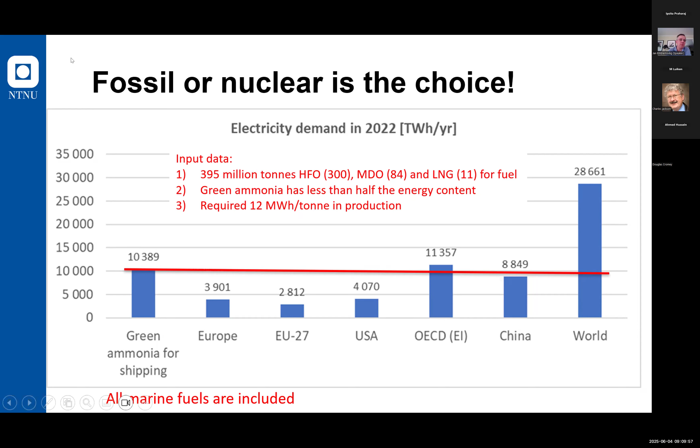And hydrogen gas is a very problematic molecule. In my last industry job before I came to academia, I was heading a company that made thick pressure vessels for the oil and gas industry, with a lot of complicated welding. And hydrogen gas is one of the worst things you can get up from an oil well, because it leads to stresses in the welds, can lead to failures, failed steel structures, etc. So it's a very difficult molecule to control.

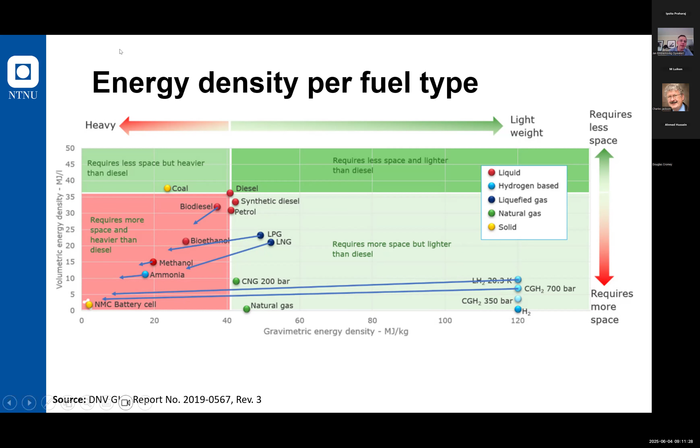But assume that those long arrows are 1 meter; then uranium would be 32 kilometers away from where you are sitting now, and thorium even farther. And I think this is really what the green transition has to be about. When we change energy density from what you see here on diesel to something dramatically different and better, then we really start talking.

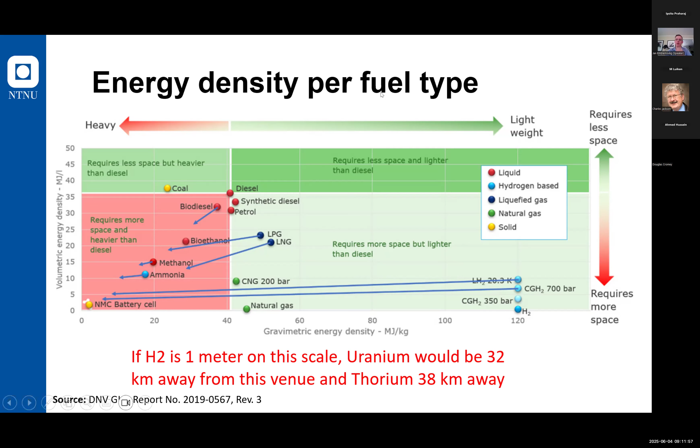So we are looking at basically two major opportunities. One is, of course, to put the nuclear reactor directly in the ship and have so-called direct nuclear propulsion. And we see a lot of possibilities here, as you can see: faster ship, no emissions, walk away safe, even lower cost. We'll come back to that. There are, of course, challenges,

obviously. We can also make synthetic fuel by using, for example, big nuclear facilities on land, and then make fuel either from the rest heat through thermochemical processes or through electrolysis using power. But as you saw on the slide before, that leads to a lot of losses. But it is possible, absolutely.

So in our research now, we have discovered that if we have more than 5 megawatt installed power requirements in a ship, then direct nuclear propulsion is the best. Smaller ships, aviation, trucks, and those kind of things would probably need synthetic fuel. And by the way, aviation is almost as bad as shipping. So when you take aviation and shipping together, the challenge is really massive.

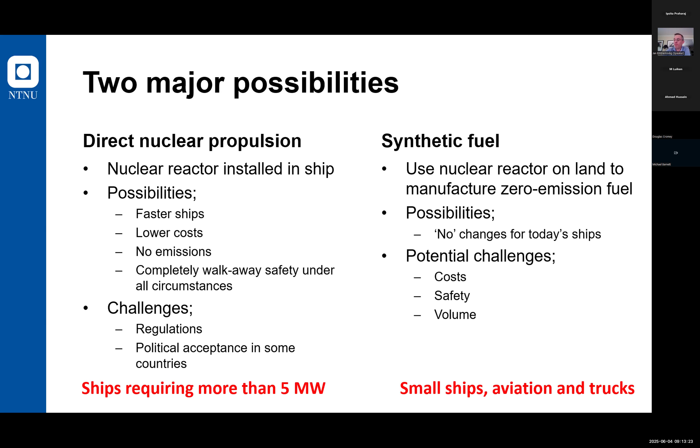So we did our first initial analysis. This is an Aframax tanker. And as you can see, it's actually the second smallest of what we call deep sea tankers. Deep sea refers to the part of the maritime industry that basically crosses the world's oceans, from Europe to US, Canada, from Canada to China, across the Indian Ocean and so on. The long stretches, that's the deep sea.

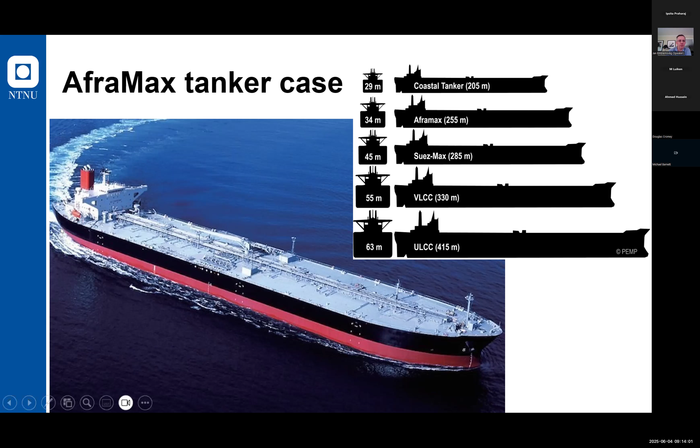We were lucky to get some data on it, which made this calculation possible. And here you see the engine of it. It's a two-stroke heavy fuel oil engine from Wärtsilä. And this is actually a quite small two-stroke engine, by the way. It's a 15 megawatt output from the electromotor that drives the propeller.

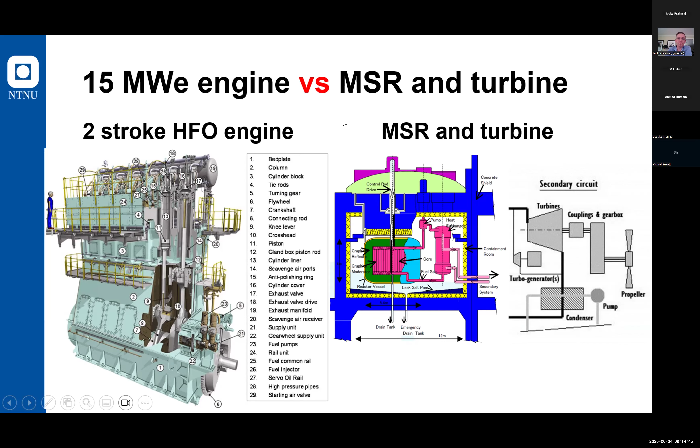We looked around and we found the Fuji reactor concept in Japan, a molten salt reactor. And the smallest one had the same output, so essentially comparable. And then we tried to do some economic estimates. Assuming 6.5% weighted average cost of capital over 30 years, the net present value is shown in the graph below.

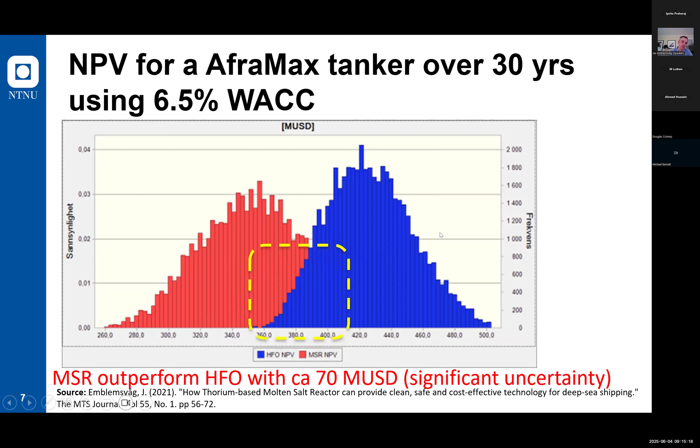And as you can see, the molten salt reactor actually outperformed the heavy fuel oil. In this case, if you take a look at the average values, it's about $70 million difference over 30 years. But you see those two distributions overlap, meaning a significant amount of uncertainty. This analysis was published in 2021, so it's 5 years old. I will come back with something more updated soon. But first, a little bit more about what we've done.

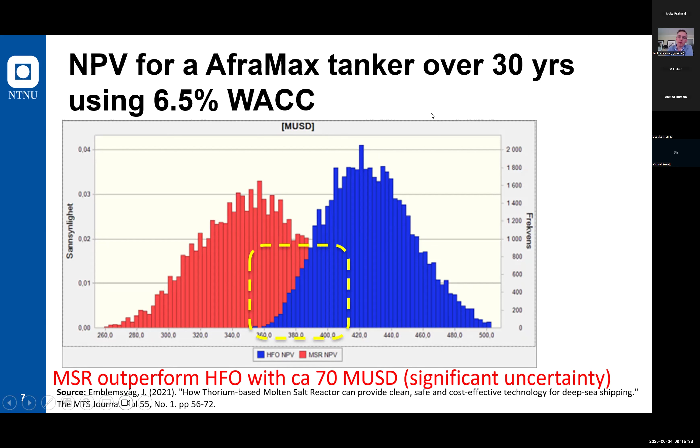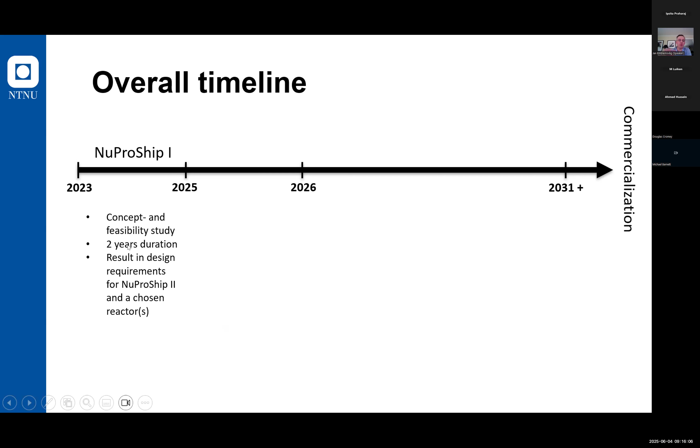So this led to a more generic question. Can a molten salt reactor, or any other generation 4 small modular reactor for that matter, outcompete heavy fuel oil head on without subsidies? That led to the NuProShip projects, nuclear propulsion for merchant shipping. And this is the abbreviation. First number 1, and now we're doing number 2. In number 1, as you can see, it's a concept feasibility study, and I will go through some of the main things we discovered.

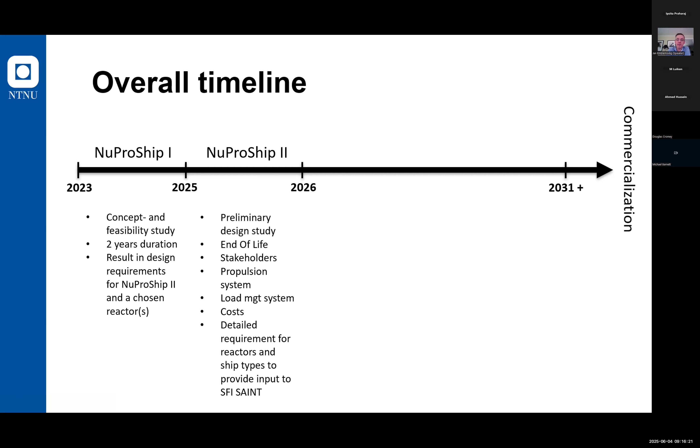In number 2, we're basically doing more of the same, except much more details. We start to look at end of life. We start to think about stakeholders, the whole propulsion system, the load management system, etc. And today, we just submitted the proposal for funding for SFI SAINT, which is essentially a research center on nuclear propulsion at the university here, together with our partners in NuProShip that I will also come back to later. And we hope that this whole sequence of projects will actually lead to a demonstration project.

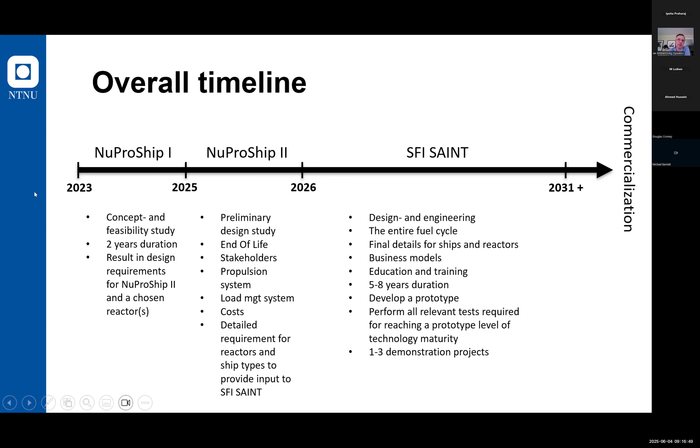So how did we arrive at the reactors that we're now working on? Well, we basically took all the known concepts by 2022 in the IAEA and also the Nuclear Energy Agency of the OECD. Then we developed 11 exclusion criteria. Going from left to right, starting at the top: of course, if it's too large, we can't use it. If it's not mature enough, we can't use it. Light water reactors, we also just took out immediately for a number of reasons. One of them is actually political.

Light water reactors have had too many smaller and bigger accidents to make them work politically in our technology that will have to go from port to port, country to country. But there are also more scientific reasons, to put it like that. They need too large an emergency zone, protection zone, around them because of the pressure, for example. Or they have also proven to be too costly.

Then no classic high temperature gas reactor pebble bed technology, because the pebbles will rub up against each other, create potentially dust in the reactor, and that could be a problem. Then, of course, proliferation, very, very important. Safety, very, very important, of course, and we do not want reliance on active safety systems. It has to be passive or inherent. Then, no violent interaction with water, of course. That's a very bad property on a ship.

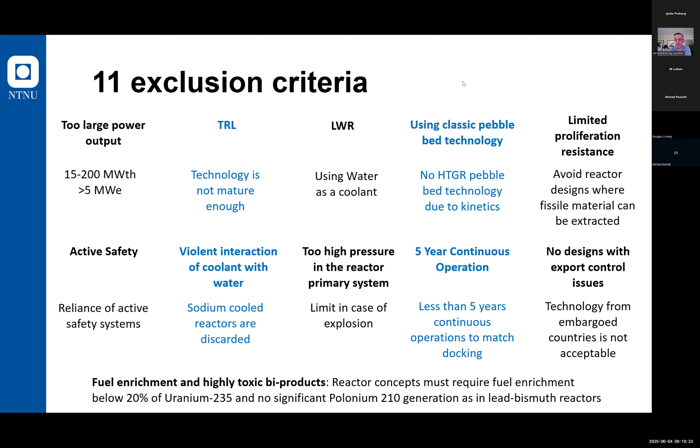Then we started to do more work on this. We also realized that enrichment, but also highly toxic byproducts could be an issue. So that's the 11. So we went from basically 80-some reactor concepts, and this allowed us to trim it down to, I think we were down to 8, if I remember correctly. Then these 8 were subjected to 26 selection criteria. These are not on-off kind of criteria. Here we're talking about degrees.

When we started working on this, we realized that the cost numbers for different vendors were, what should I say, unclear. It was not clear to us what they had included and not, and so on. So basically, we decided, okay, let's put the rest at that. We're taking it in NuProShip number 2.

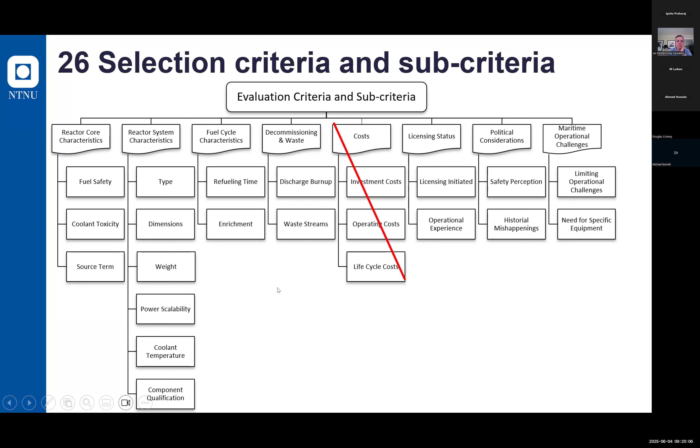Then we also learned a very interesting case about the proliferation rules that basically inhibit molten salt reactors with molten fuel in and out of a port. Basically, the IAEA would like to have a counting mechanism that's very robust. So they need countable fuel. And the problem with a molten salt reactor is that you have almost the entire periodic system in the salt at times, and keeping the exact radiological account requires measurements that are not agreed upon. So we realized that it could be 1 decade, 2 decades, a long time before something like this would be allowed. So we parked them.

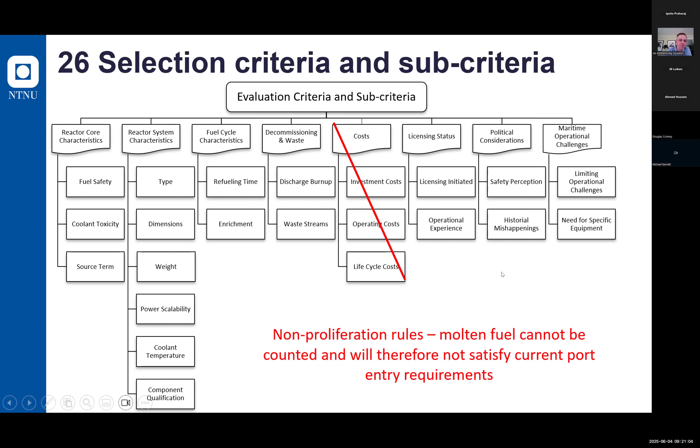So then you can wonder, is there anyone left? And there are, actually. We ended up with a helium gas-cooled reactor on TRISO fuel, a molten salt reactor on TRISO fuel, and a liquid lead reactor using uranium nitride. All these scored very well on our 26 criteria.

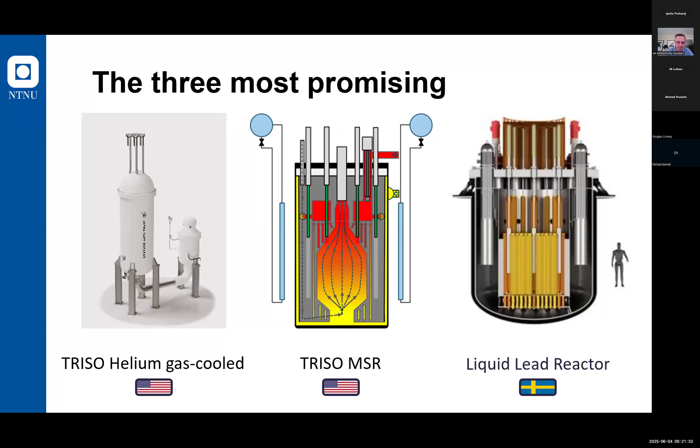So, a little bit about the TRISO fuel. We believe that could be a maritime game changer for a lot of reasons. First of all, it contains everything that people are so scared of, which is a good thing. Second, it makes misuse of the fuel very difficult. You have to be a very advanced actor to be able to handle this, and for such an advanced actor, it's probably easier to just do it from scratch if they want to make a weapon or whatever. Third, it can take a very long time in seawater. We saw one article that said more than 10,000 years. So there are a lot of good things about this.

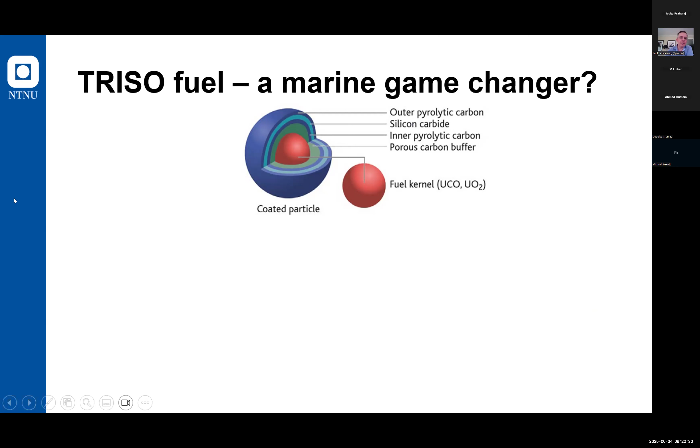Basically a same kind of concept, but even more compact, more ceramics. It's very difficult to misuse any of these fuels, and that's why we think this could be a real game changer. Another thing is that the marine industry has a very high alternative cost.

Some people have asked me, well, this will be too expensive because it's more expensive than uranium oxide on land, and they take a kind of land-based line of argument. It's just that the alternative cost for marine is completely different. We've done analysis showing the fuel is actually cheaper than heavy fuel oil.

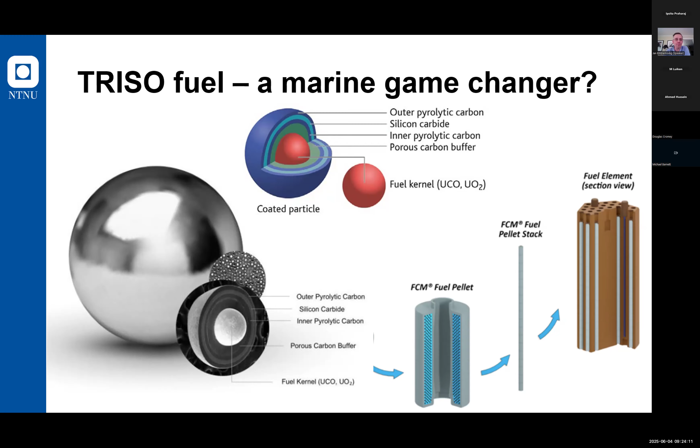So then we're left with the other things, the reactor, the steam turbine versus the diesel engine or whatever they use today. And then we have the benefits of longer range, higher speed. So that's why we believe this study we did 5 years ago is still holding true, meaning that it is more beneficial.

So we have a number of cases that we work on. Here's one, it's our LNG tanker. In this case, we realized that a molten salt reactor and steam turbines would be a very good fit.

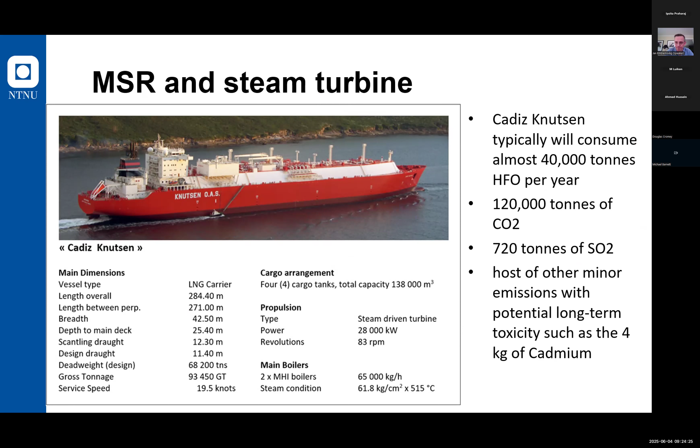Then we also have a smaller helium gas cooled reactor, designed by reactor designers who used to work at UltraSafe. Many of you are probably aware of UltraSafe going through Chapter 11 last year, which had to do mostly with strategy issues. The new owners wanted to take the company in a different direction, which enabled the guys working on the reactor design to set up a new company called Emerald.

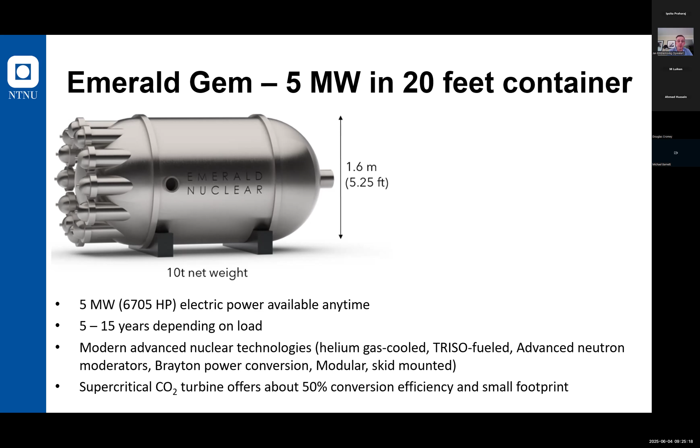We've worked with them for 2 to 3 years, and they've now designed a marine version. This is a very nice little package, 5 megawatts, and you see the sizes, very handy. Combine it with a supercritical CO2 turbine, and you get something that's really, really interesting.

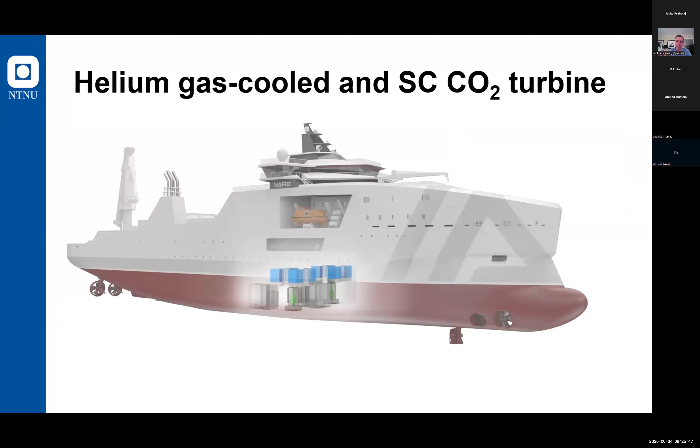This is something that would fit in the typical ships that we build around here. When I was running one of the shipyards in Vard, I don't know, 10, 15 years ago, we built many of these, of course, and this is a really ideal fit for such a kind of technology.

We just submitted an application where we will look at obtaining the funding required to make a digital twin of one of these vessels, which are under construction right now as we speak. Then we can make a digital twin, feed it with live data, and prove that this digital version should work. And then, of course, the next step will be to build one.

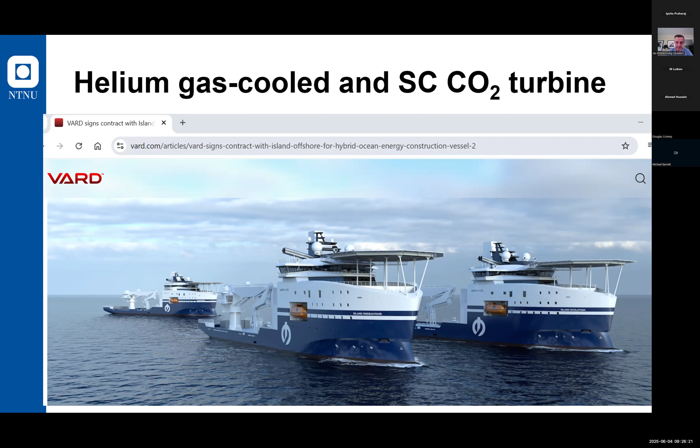And the third one, the lead-cooled reactors, they don't like ramping essentially, they need 80% load at least. But there are many, many applications in the maritime industry and also offshore, oil and gas, and land-based power. So many opportunities where a floater like this would be very ideal.

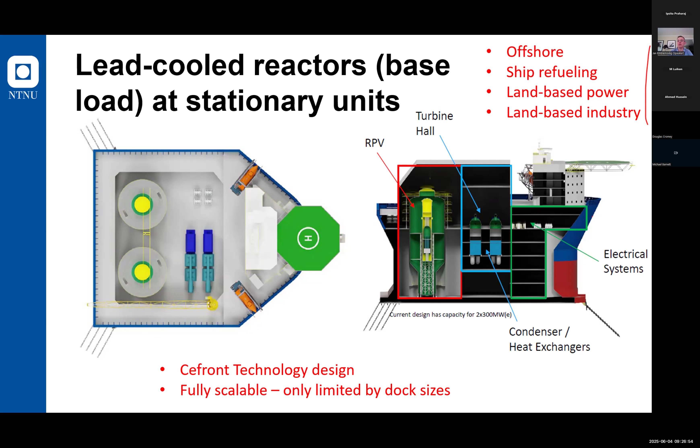So all these 3 use cases are now being studied in NuProShip 2 and will be taken into the research center if we get the funding, of course.

Here's the work packages, just a little bit more. You see nuclear island, ship safety, WP2, WP3, operational safety, crew maintenance. This is from NuProShip 1 being carried over into NuProShip 2, but we've added 3 more packages: balancing ship power plant, remote monitoring operations, cybersecurity, and of course stakeholder involvement.

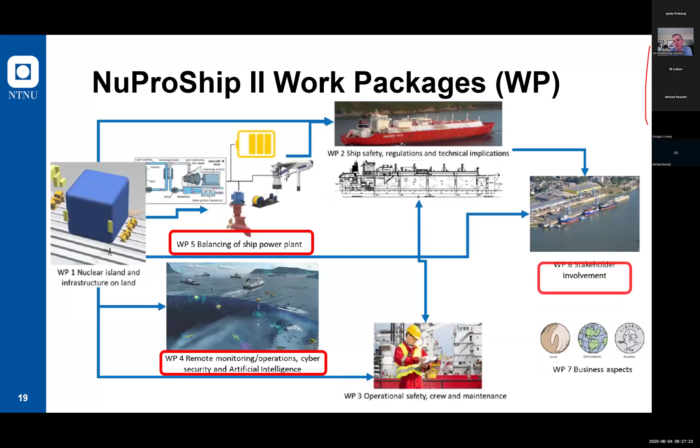They have separate funding. The floater, we are still working on engaging with the customer on that. We would like to have an active customer in the project like we have for these LNG tankers and offshore construction vessels, because with an active customer, you get all the nitty-gritty details that have to be addressed correctly. Otherwise, it is not realistic.